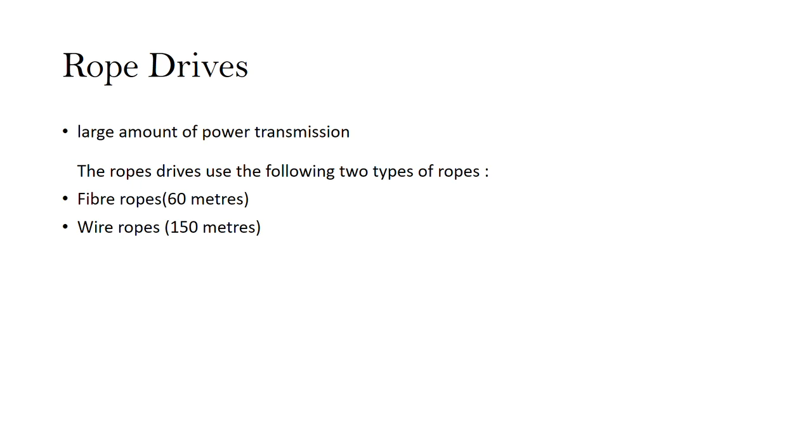The ropes used in the rope drives are fiber ropes and wire ropes. Fiber ropes can transmit power over a distance up to 60 meters, and wire ropes can transmit power up to 150 meters. Fiber ropes. Fiber ropes are made from fibrous material like hemp, manila, and cotton. The rope made from hemp and manila is not very flexible, and they possess poor mechanical properties. They are very rough in nature.

So when we wind the rope on the pulley, there will be a sliding and there will be a wear. So to avoid this, these ropes are lubricated with tar, tallow, and graphite. Cotton ropes are very soft and smooth. The lubrication of cotton rope is not necessary. If lubrication is done, it will reduce external wear between rope and the pulley.

The fiber rope drives have the following advantages. They are smooth, steady, and quiet in service. They are little affected by outdoor conditions. The shaft may be out of strict alignment. Power transmitted may be taken off in any direction and in fractional part of the whole amount. They give high mechanical efficiency.

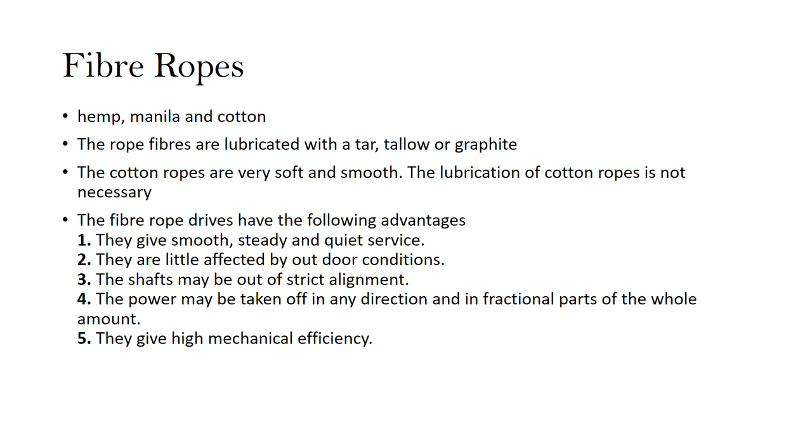These are the sheave for fiber ropes. Sheave, this is another name of groove pulley. So the groove of the pulley is narrow at the bottom and the rope is held in the edges of this groove to provide the wedge action.

The groove of the pulley should be smooth finish to reduce the wear due to friction. The proper size of the pulley is 40 times D, and the minimum size should be 32 times D, where D is the diameter of rope. The ratio of driving tension for fiber rope is similar to the V belt, and the design is also similar with V belt. The relation is given here.

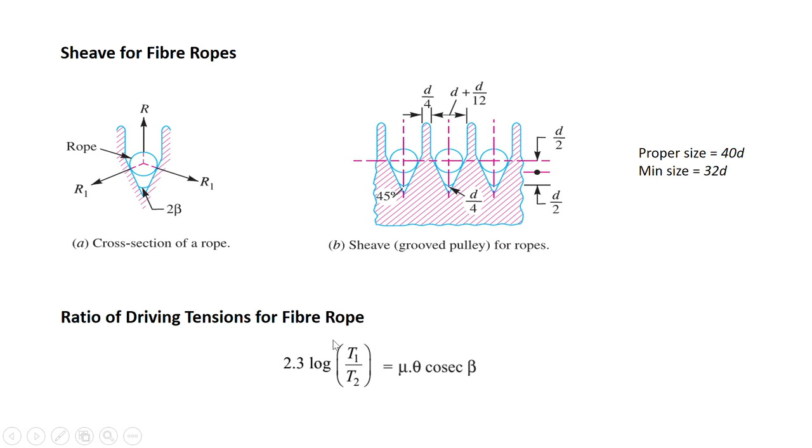Wire ropes. Wire ropes are widely used in elevators, mine hoists, cranes, conveyors, hauling devices, suspension bridges. Wire ropes run on groove pulleys, but they rest on the bottom of the groove and are not wedged between the sides of the groove. Here you can see the diagram of groove pulley and groove of the pulley and the wire rope. Wire rope is at rest at the bottom of the groove. It is not wedged between the sides.

The size of the groove has a great influence on the life of the rope and the service. If the size of the groove is bigger than the diameter of the rope, it will no longer provide the support to the rope, and the rope will no more be circular and it will flatten out. If the size of the groove is smaller than the rope size, then the rope will not support at the bottom. It will be wedged between the sides, and the normal rotation will be prevented.

The wire rope has the following advantages as compared to the fiber ropes. They are lighter in weight. They offer silent operations. They can withstand shock loads. They are more reliable, durable, and they do not fail suddenly. In case of fiber rope, it fails suddenly. The efficiency is high and cost is low.

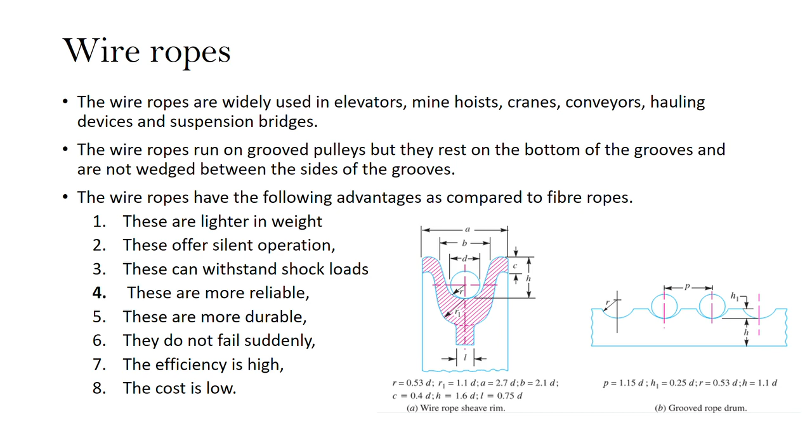The constructions of wire rope. Wire ropes are made from various grades of steel wires from 120 to 200, having a tensile strength ranging from 1200 to 2400 megapascal, which is shown in table. To construct a wire rope, first of all, the steel wires are heat treated and cold drawn to have strength and durability. Then a number of wires such as 7, 19, 37 are twisted into strands, and then a number of strands, usually 6 or 8, are twisted about a core or center to form the rope.

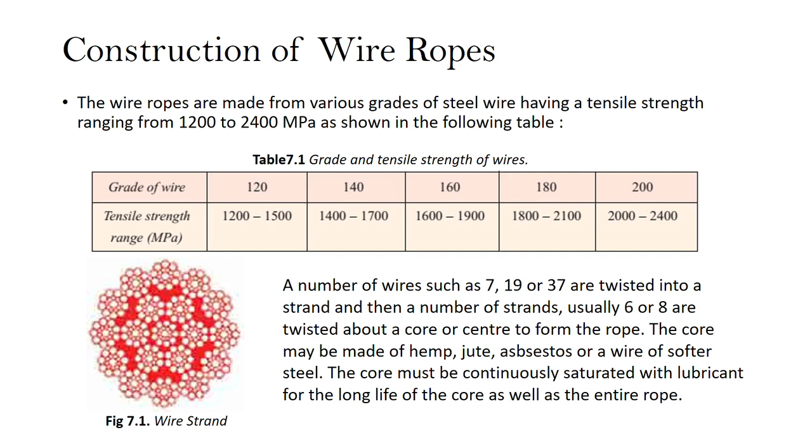The core may be made of hemp, jute, asbestos, or a wire of softer steel. Asbestos core is used when the wire is subjected to radiant heat. The core must be continuously saturated with lubricant for the long life of core as well as the entire rope. The provision of core makes the rope less flexible, and the rope can be used where it is subjected to high compression. This is the diagram of wire rope. This is the core and these are the strands.

The wire rope is designated by number of strands into number of wires in each strand. So here the number of strands is 6 and the wires in each strand is 7. This is a 6 into 19 rope and this is 6 into 37 rope.

The classification of wire rope is based on the direction of twist of a strand and the wires in each strand. Depending on the direction of twist, they are classified into 3 types: cross and regular lay ropes, parallel and lang lay ropes, composite or reverse laid ropes. In cross and regular lay ropes, the direction of twist of wire in strand is opposite to the direction of twist of strand.

And depending on the formation of the helix, ropes will be classified as right-handed and left-handed. In parallel and Lang lay ropes, the direction of twist of wire in strand is the same as the direction of strand. In composite and reverse laid ropes, the direction of twist of wires in two adjacent strands is opposite.

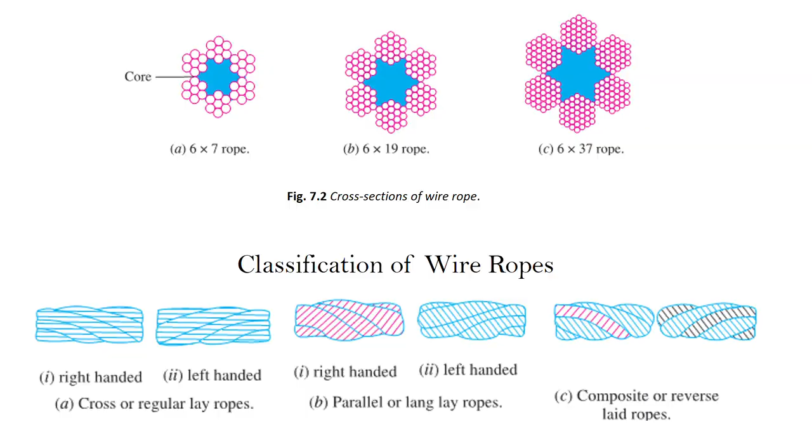Designation of wire ropes. The wire ropes are designated as the number of strands multiplied by the number of wires in each strand. So this table gives the standard designation, and this table gives the different types of rope and their application.

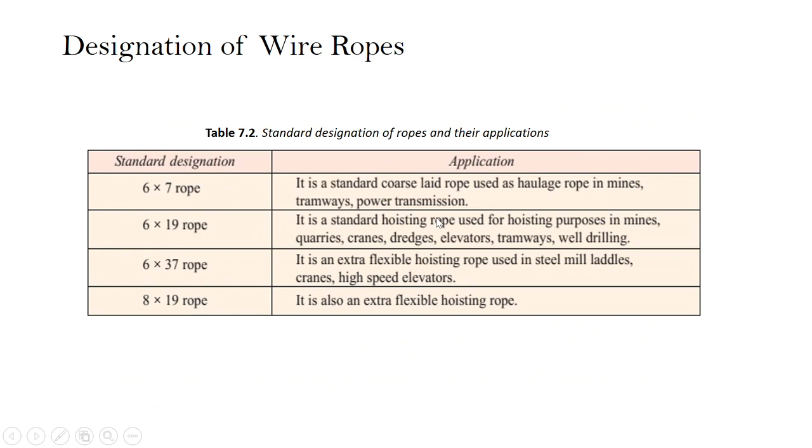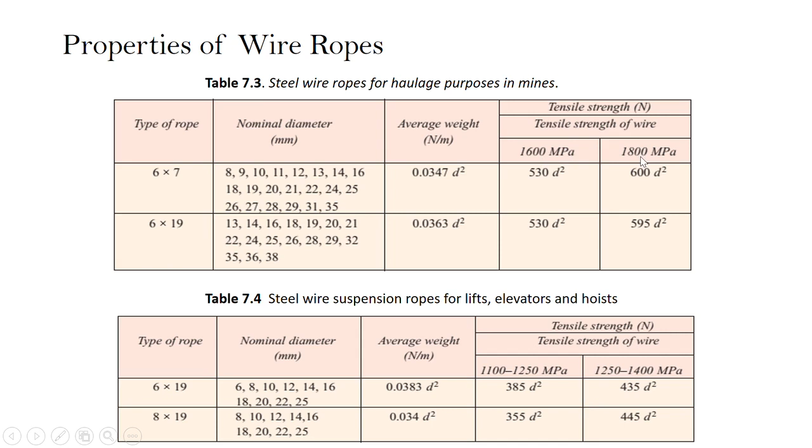This is the tensile strength in Newton, which is given for two types of wire having different strength: 1600 megapascal and 1800 megapascal. Similarly, this and so on. The diameter of wire and area can be calculated with the help of this table 7.7. In this, wire diameter is represented as dW and the area of the wire rope is represented as A.

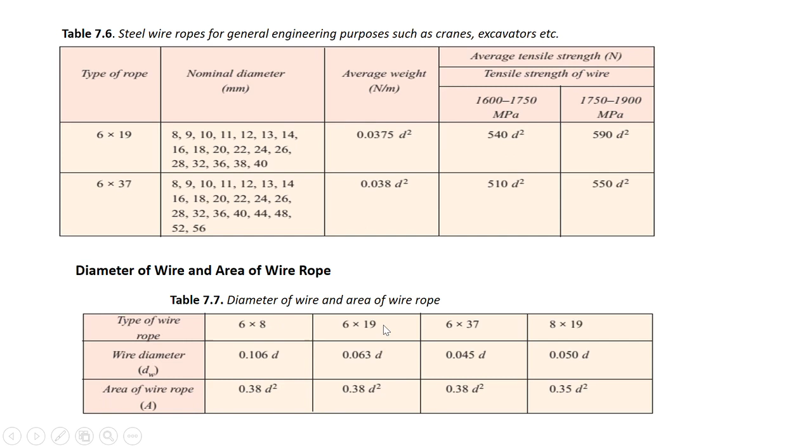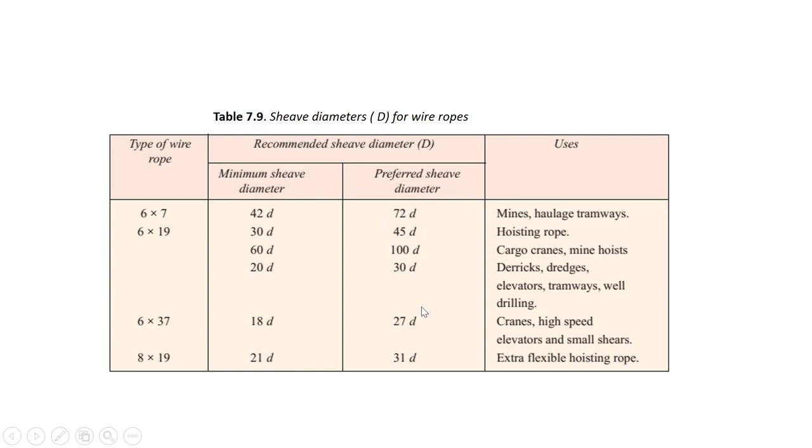The stresses in wire ropes. So wire ropes are subjected to different types of stresses. Direct stress: when the rope is lifted, it is subjected to a direct stress, which is given by capital W plus small w divided by A, where capital W is the load lifted, small w is the weight of rope, and A is the net cross-sectional area of the rope.

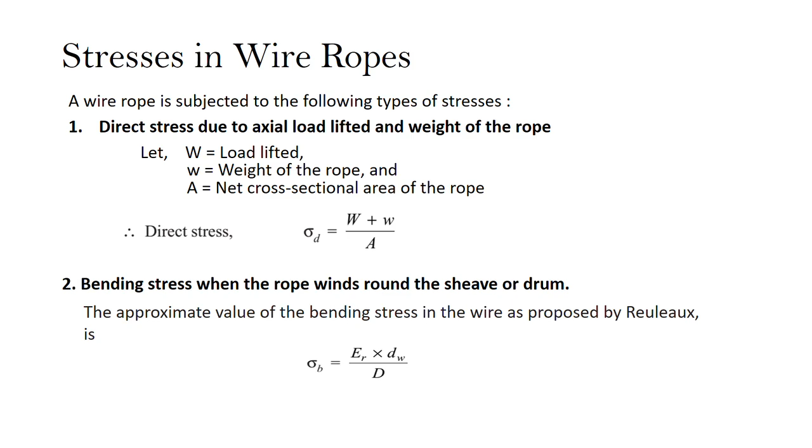Second is bending stress. When the rope is wound on the pulley, a bending stress is induced, and the approximate value of the bending stress in the wire is proposed by Reuleaux, and it is given as sigma B equal to ER into dW divided by capital D. dW is the diameter of wire, capital D is the diameter of pulley, and ER is the modulus of elasticity of wire rope. Here ER will not be the modulus of elasticity of wire material. It is the modulus of elasticity of wire rope, which is 3/8 times the modulus of elasticity of wire material, and it is 77 gigapascal for wrought iron ropes and 84 for the steel ropes.

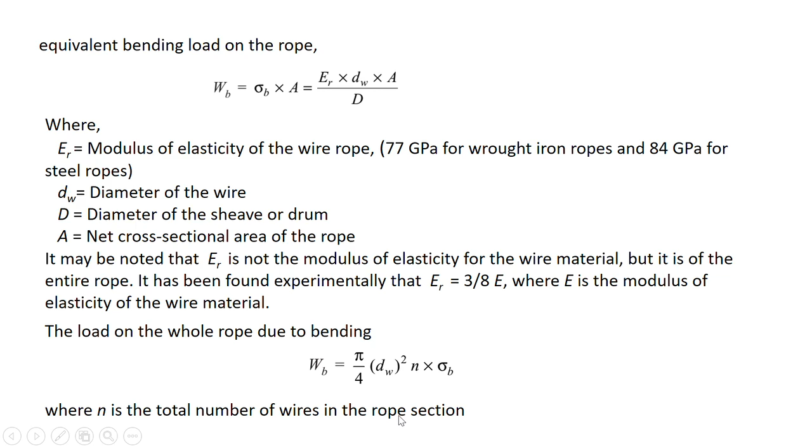The equivalent bending load can be calculated by multiplying the bending stress with the net cross-sectional area, which is written here, and the total bending load on the rope is given by this, by putting the value of A in terms of wire diameter. Here N is the total number of wires in the rope section.

Stresses during starting and stopping. During starting and stopping, the rope and the supported load are to be accelerated from 0 to some velocity v, and this induces additional load in the rope, which is given by mass into acceleration. Here mass will be capital W plus small w divided by g, and for the corresponding stress we will divide this expression by A. If it takes time t in minutes to obtain speed v, then acceleration will be equal to v divided by 60 times t, where t is in minutes.

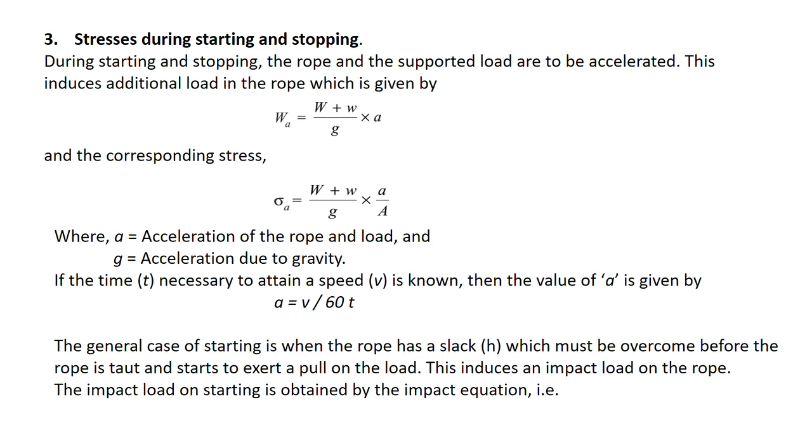In the general case of starting, when the rope has a slack, which must be overcome before the rope is taut and starts to exert pull on load, this induces an impact on the rope, and the impact load on starting is obtained by the impact equation, which is given here. The load at starting is designated as WST, where VR is the velocity of rope at the instant when the rope is taut. VR equal to under root of 2 into a into H. Here H is the slackness in the rope.

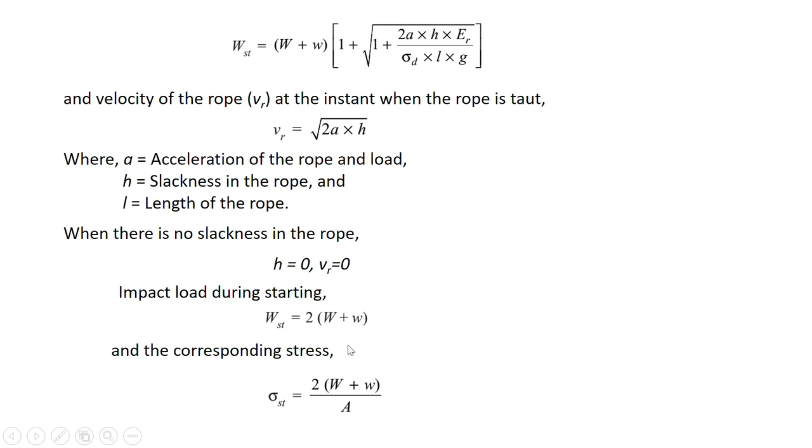If slackness is 0, then VR will be equal to 0, and the impact load during starting will be equal to 2 times capital W plus small w, and the corresponding stress will be obtained by dividing this by A. Stress due to change in speed. Additional stress due to change in speed may be obtained in a similar way as above, in which the acceleration is given by a equal to V2 minus V1 divided by T. Here T is in seconds.

Effective stress. The sum of direct stress and bending stress is called the effective stress in the rope during normal working. Mathematically, the effective stress in the rope during normal working will be sigma D plus bending stress. Effective stress in the rope during starting will be the stress in starting plus stress due to bending. Effective stress in the rope during acceleration is given by direct normal stress, stress due to bending, and stress due to acceleration. Sum of all these.